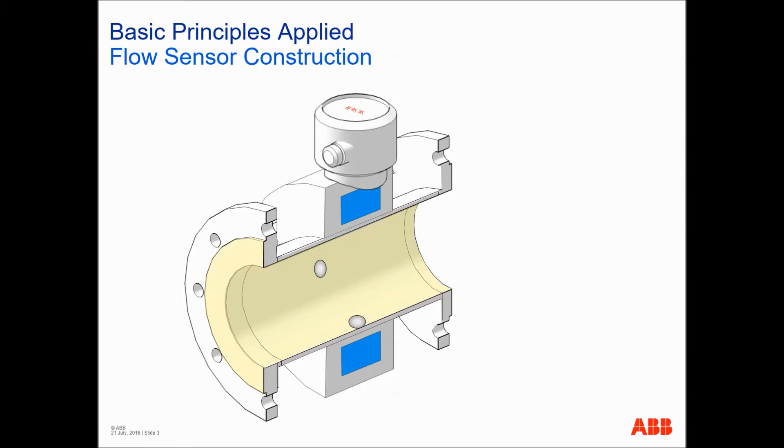Let's start this presentation by discussing the construction of flow sensors. The major components of a flow meter are the process connection, which is the flange, and it determines pretty much the pressure rating of the meter.

The outer flow tube is either welded onto the flanges or cast as an integral part. The sensor coil housing not only protects the sensor coils from the environment, but also the electrodes. The sensor head contains sensor electronics and user connections.

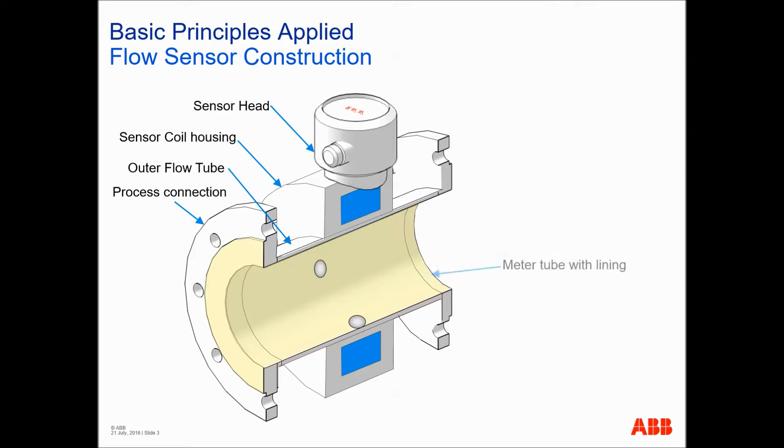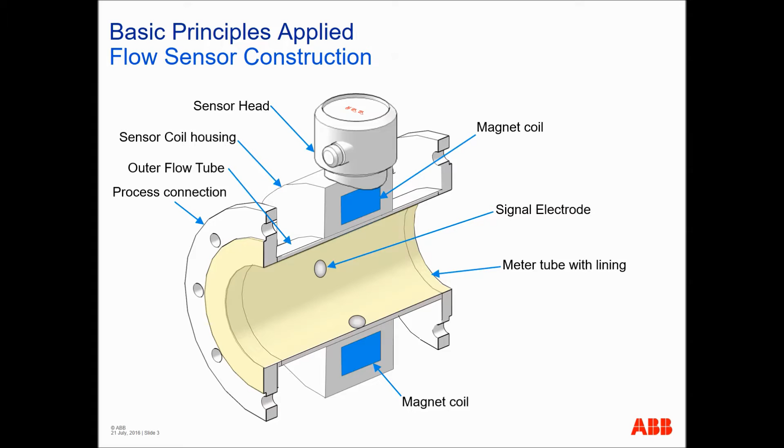The meter tube lining insulates the flow stream from the sensor body, the metal parts. The magnet coils, of course, set up the magnetic field. The signal sensing electrodes, there's two of them, one at the 3 and one at the 9 o'clock position. And some meters have a ground electrode.

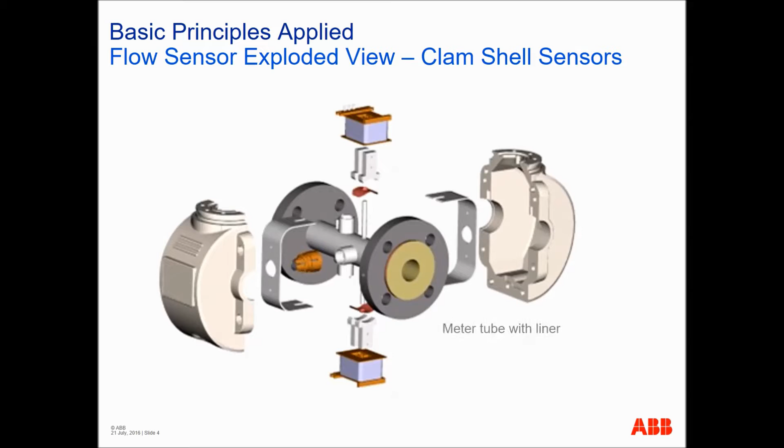Now let's take a look at a flow meter assembly and its components. We start off with a tube and a liner. The magnet coils are wound on precision spools. The mounting shoe and the guides position and hold the coils in place. And there's a signal electrode, which is usually built inside of a protective casing.

There's the ground electrode. It's basically just another electrode, but it's at the bottom of the meter at the 6 o'clock position. And then we have the magnetic circuit, which we'll discuss a little more in a minute in the upcoming slides.

And then the sensor housing. This is a clamshell design, which is bolted together and sealed so that water doesn't intrude into the internal parts.

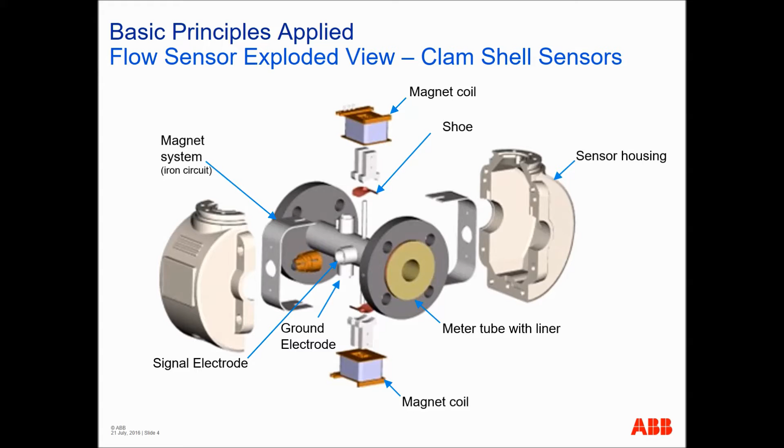Let's take a look at a flow tube, the basic components: the magnet coil, the spool, the stainless steel tube, the flow signal electrode, and the liner.

Without an iron circuit, if we were to excite the coils, it would set up an unevenly distributed magnetic field across the flow tube.

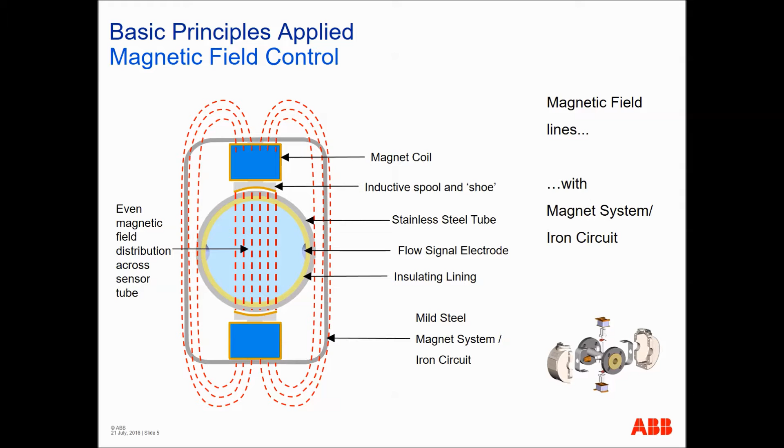If we were to add an iron circuit, mild steel, the magnetic force lines would be more evenly distributed across the flow tube, allowing for a much cleaner signal.

We have to remember that the calibration accuracy of an electromagnetic flow meter is dependent on the cross-sectional area of the flow tube, the column of water flowing through it, and the time it takes to go through that flow tube. If the pipe is not completely full, you inherently generate an error, and that error can be as much as 50% of the flow tube.

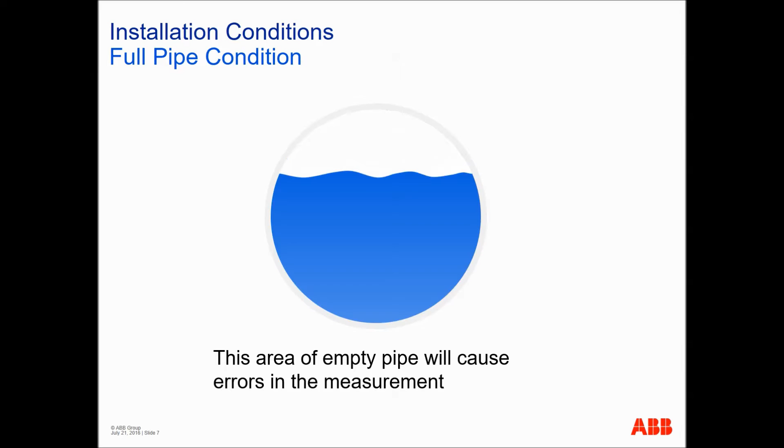If the electrodes are at the 3 and 9 o'clock position and they're covered by water while almost 50% of the pipe is empty, you would have a substantial error on the meter, and the meter would not know that it's not totally full.

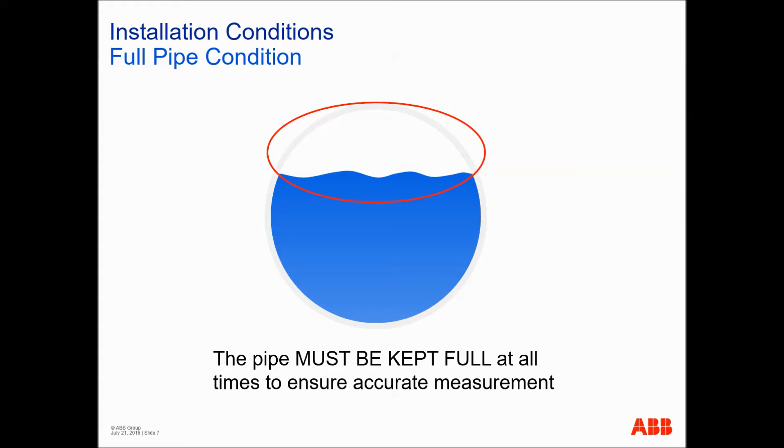This is where the installer, or not necessarily the installer, but the designer, has to ensure that the meter is installed such that it is constantly full and there is no possibility that you would have an air pocket trapped in the upper portion of the meter.

In this example, you can see that we recommend in a situation like this that the meter not be at the high point of flow, but rather that you could put it in the vertical position with upward flow.

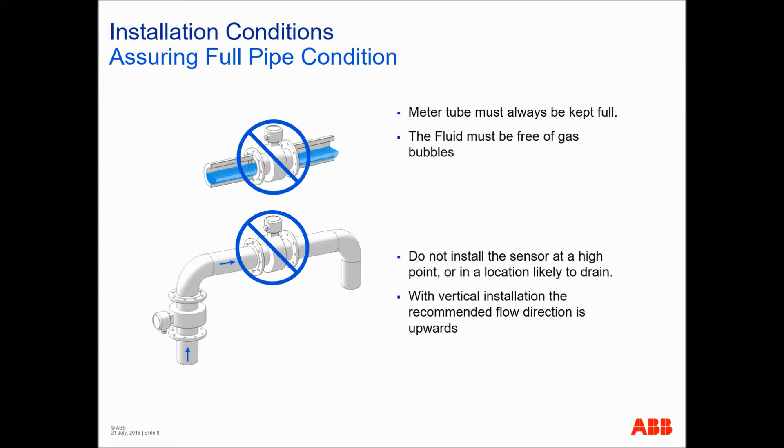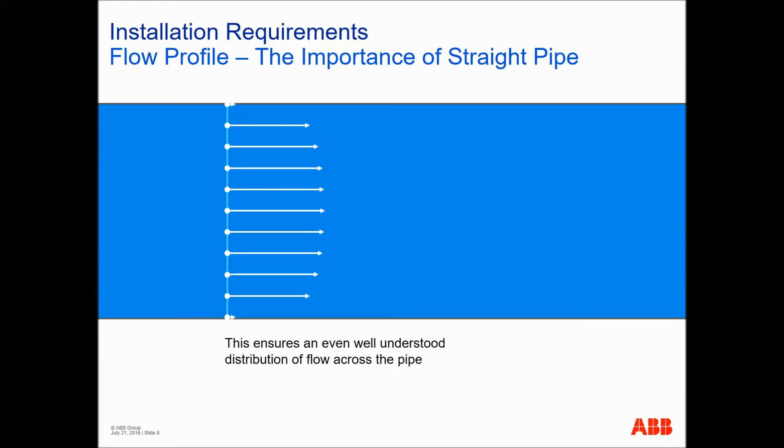We're always talking about the flow profile and turbulence. Mag meters for accuracy require a laminar flow profile, and that essentially is a profile where the maximum velocity is in the center of the pipe and it diminishes to zero as you get to the outside of the pipe.

We can take a look and see what happens to that laminar flow profile when you introduce a flow from an elbow or a T-section.

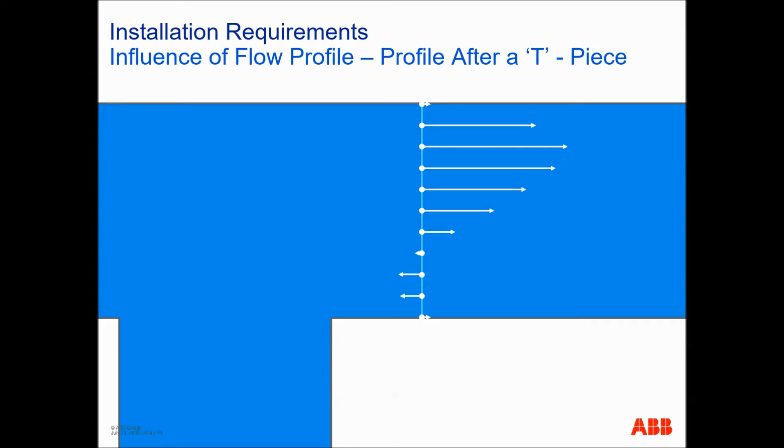If we take a standard flow profile and then introduce a flow from a T, you can see that as it rounds the corner, the velocity at the upper part of the pipe is going to be greater than the middle of the pipe. And in the lower portion of the pipe, you can actually see that the flow profile is reversing.

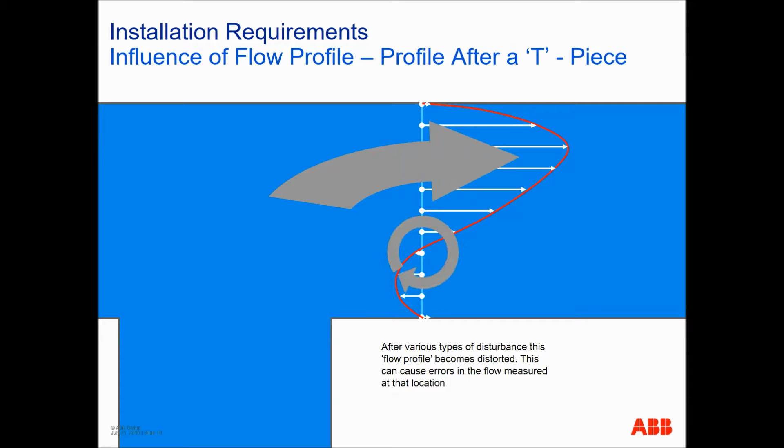This reversing actually causes a swirl in the meter. This is probably one of the biggest problems people have when they put a flow meter on an elbow in the wrong position without enough upstream diameter to dissipate that swirl.

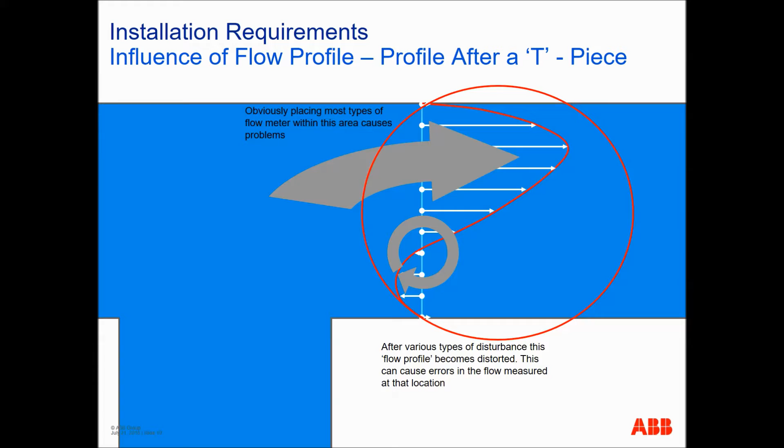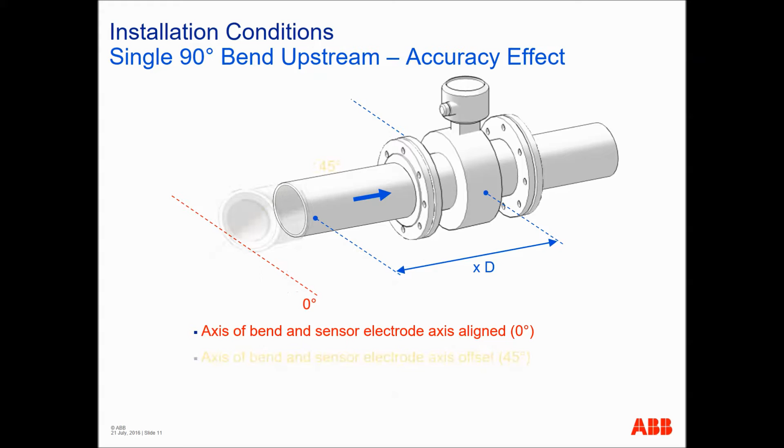Let's take a look at a couple of instances where we're going to put an elbow on the upstream side of the pipe at X diameters upstream. It's a 90-degree elbow, so let's start at the zero position. It could be either 0 or 180 out, coming the other way. Or you can put it in at 45 degrees or any angle in between. Or come in from the 90 degree, or flip it completely over and come up into the pipe.

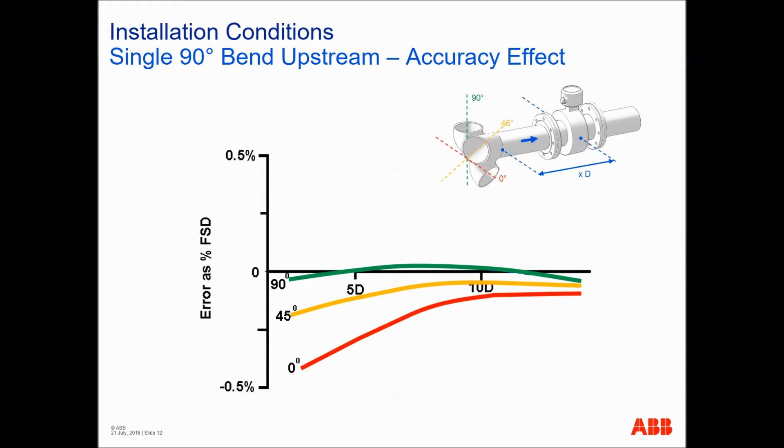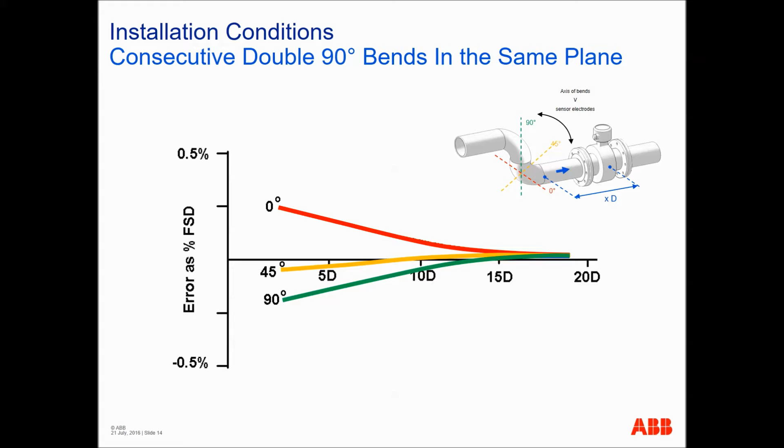It's predictable to a degree, but yet very unpredictable. And again, your best bet is to try and get as much upstream separation or straight run as possible.

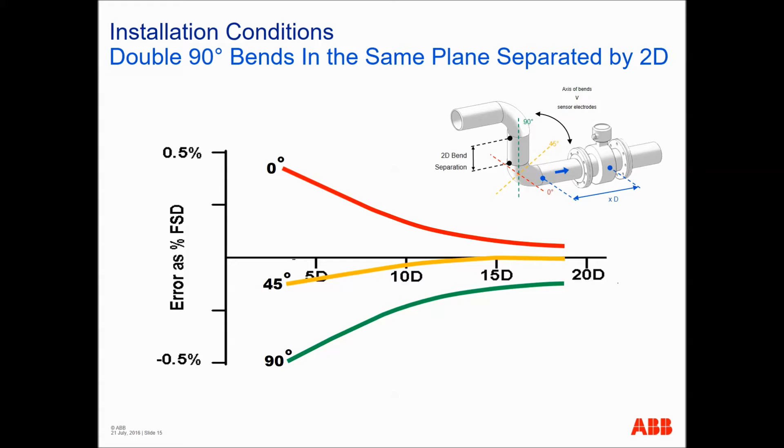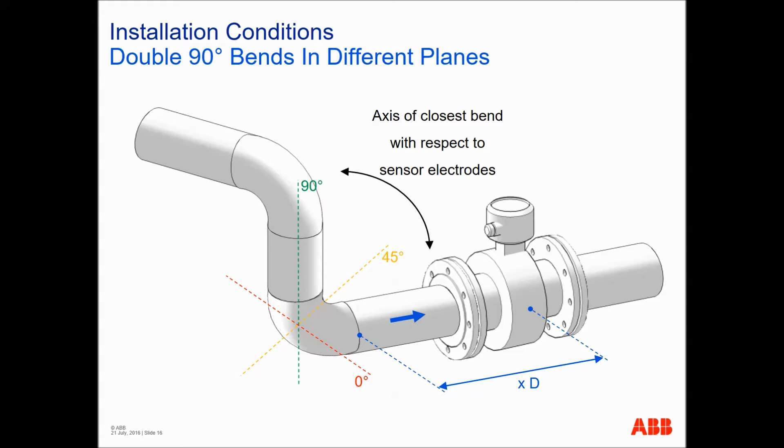Now this really starts to get crazy when you bring double 90 degrees in on different planes. And again, you're starting to mix 0 degrees, 45 degrees, 90 degrees. It literally wreaks havoc on the meter as far as turbulence going into the flow tube. And again, this is why we try and grab as much straight run as possible, to stabilize that flow before it gets into the meter and across the electrodes.

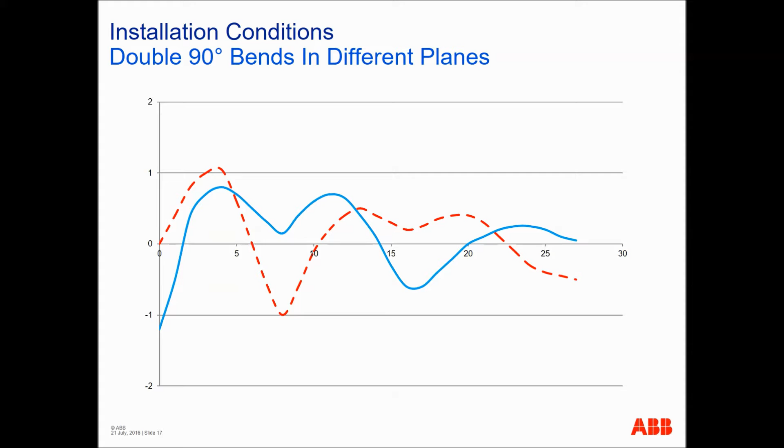By the way, we want to emphasize the flow arrow here. If you have bidirectional flow, all bets are off on this one.

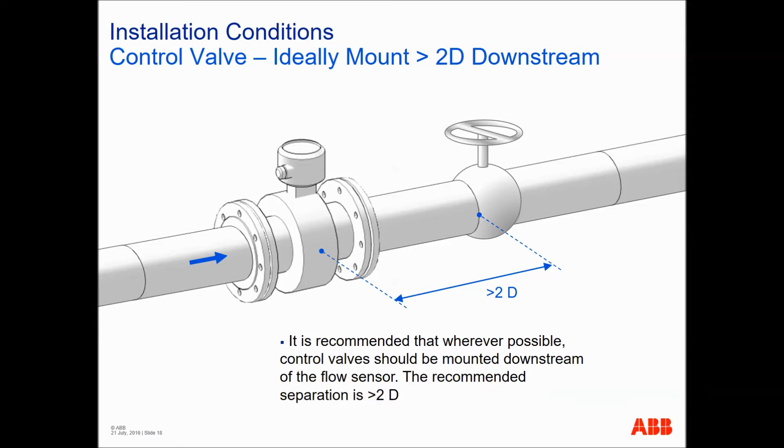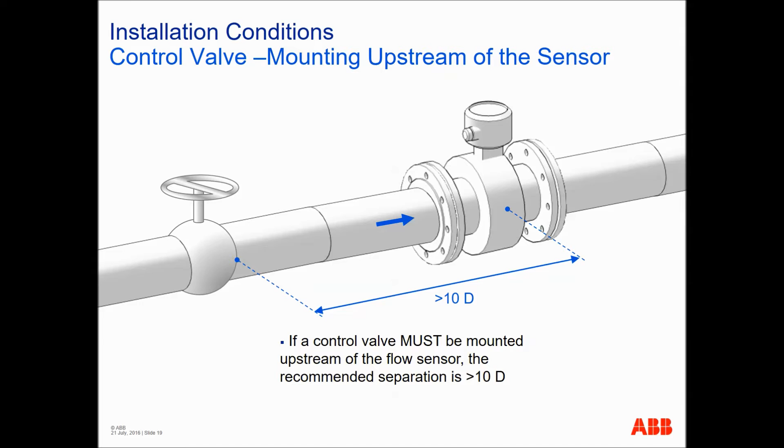The only thing you got to do here, we'll talk about bonding, is bonding would be very critical in a situation like this. And when we say bonding, we're talking electrical bonding.

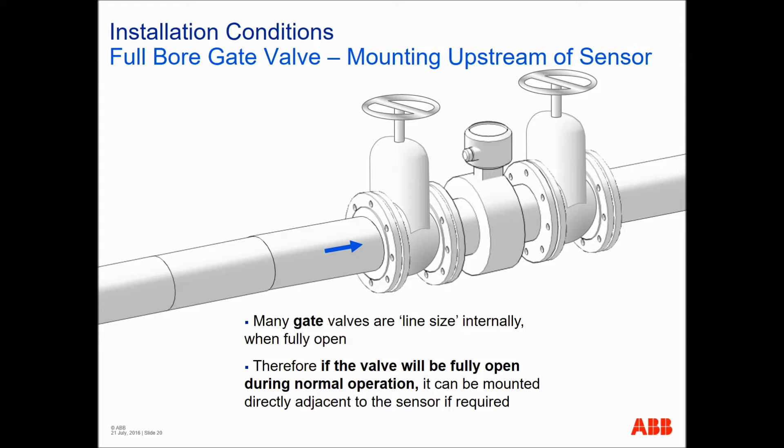As a rule of thumb, putting reducers at the inlet and outlet of a mag meter really doesn't affect it, as long as they are concentric tapers and not eccentric tapers. If you have an eccentric taper, you're automatically going to change the velocity on one side as opposed to the other, and that will cause turbulence and inaccuracy in your readings.

Some of our data sheets and tech bulletins contain this table, showing the relative type of sensor and inlet/outlet upstream pipe diameters. You'll see the AquaMaster is 0 pipe diameters, both upstream and downstream. Notice that the elbows come in from above or below, so that it does not generate swirl turbulence from coming in from the side.

AquaProbe is a whole new animal. It's an insertion type meter, and they are very sensitive to turbulence and disturbed flow. So the general consensus is, on the inlet side, flow going from inlet to outlet, you're going to want 25 pipe diameters upstream and 5 pipe diameters downstream.

And they don't play nice. ProcessMaster, you can pretty much get away with 3 pipe diameters upstream and 2 downstream. The FSM 4000 again follows that same principle, 3 up, 2 down. And WaterMaster, you can have 3 pipe diameters upstream, and you'll see we have the hexagonal or reduced bore, and 0 downstream has a tendency to smooth the flow out and prevent turbulence.

And if you want higher accuracy, you've got to have that 5 pipe diameters upstream. As a parting note, it just makes common sense that the more upstream straight run you have, the smoother and more laminar your flow profile will be.

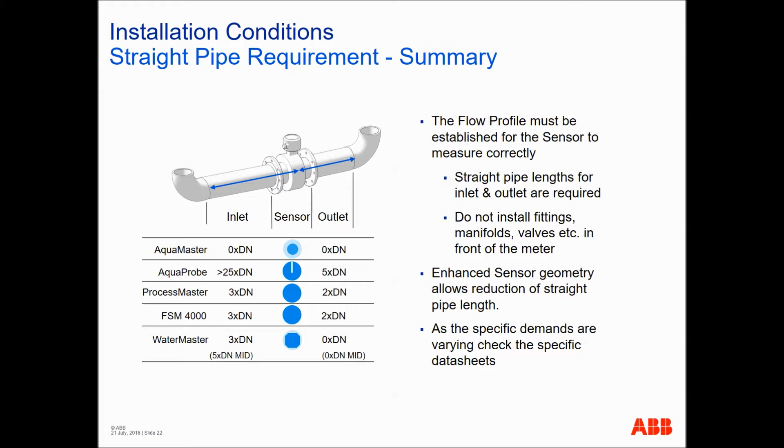Now we're going to start into the part of installing a flow meter that is the great mystery, and that is the fluid contact rings and grounding plates, and this will segue into bonding of the meter. The function of a ground ring or fluid contact ring is to complete the measuring circuit through the flow meter, from the electrode through the flow stream to the meter body. That's its function. That's its only function.

If you put them in there and use them as a metal gasket and don't hook them up, and you call us up and say my meter is reading all over the place, the first thing we're going to tell you to do is connect your ground ring to your meter body. Step 1.

Now, ground rings come in a variety of types. You'll see that we have a ground protection plate. That's a protection plate that serves two purposes: one, it is a ground or fluid contact ring, but it also protects the liner, and it's mounted on the meter, so you don't have to take the screws out or remove it. Gasketing is metal to metal. Whenever you have a metal to metal contact, you have to gasket to seal it. Metal to metal does not seal well.

Or you have your insertion ground rings. You also have your PTFE for the chemical industry. That's a conductive PTFE, and they're used... I mean, they're expensive, obviously, but they're kind of a specialty item for processes where you can't use metals like Hastelloy C or stainless steel.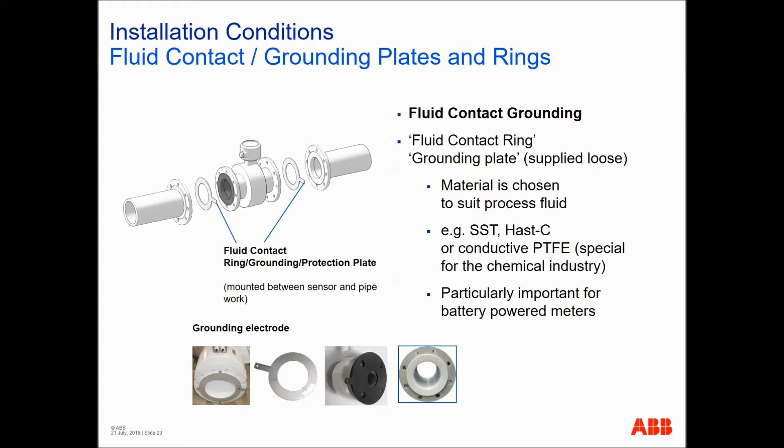But before we move into bonding, we're going to talk about something that's starting to pop up a lot in the water industry, and that is impressed cathodic protection. It's an even bigger mystery than ground rings. Impressed cathodic protection imposes a current or a potential on the metal pipe to reverse or nullify the galvanic corrosion effects. Whenever you put a metal pipe in the presence of a conductive fluid in the earth, which has minerals in it, the pipes corrode.

They coat the pipes with petroleum-based products, and now we're starting to see these impressed systems where they have big electric generators. The pipes are electrically connected to each other, and they run a 50-volt signal, as much as 50 amperes, through it. The idea is it's just like a battery. If you reverse the polarity of a battery, you're not going to kill the battery and diminish the metal product in it to generate the voltage, but instead you're going to prevent that electrolytic action from happening.

This represents a problem to mag meters because mag meters sense voltage. Here we can see we're putting voltage into the pipe, which is in the conductive flow stream, which comes through the meter and swamps the meter out, and in our meters it'll shut it down.

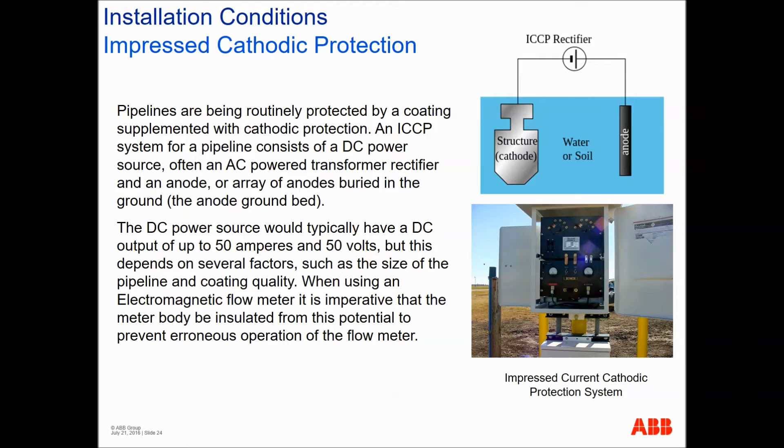When you install a meter for cathodic protection, you have to completely insulate the meter body from the pipes that it connects to. This requires insulating washers, or gaskets, on both sides of the fluid contact ring. The bolts have to be put through insulating sleeves through the flanges. The heads of the bolts have to be insulated by insulating washers, and the nuts have to be insulated using insulated washers. You don't connect the meter or the meter body to the connecting pipes.

It's a tricky thing that has to be done, and we've had several cases where people have run into problems because they don't quite understand how all this goes together. It is an expensive prospect just to put the meter in. It's not your basic nuts and bolts kit. You basically got to go out of your way to make sure that this thing is electrically insulated from the pipes on both sides.

Another addition to this, not in this presentation, but in battery-powered meters such as the Aquamaster, the sensitivity of the meter and the low voltage capabilities of the electrode recommend 50 pipe diameters upstream of insulation. In other words, what you connect to the meter, you should have 50 pipe diameters of insulation.

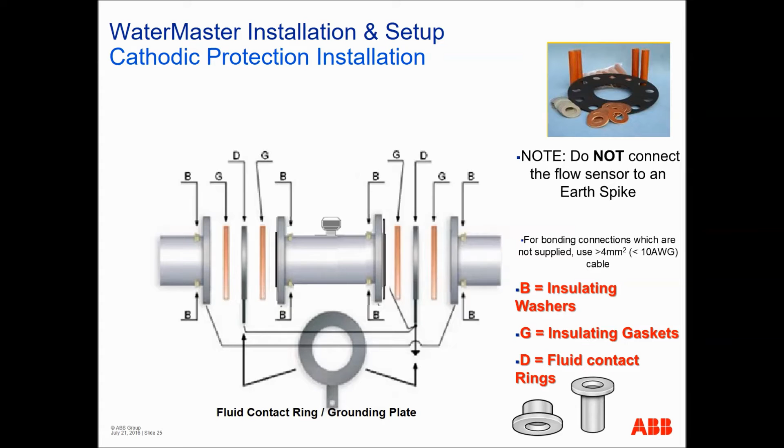Well, here's another mystery of installation, and that's the torque value. People call us up and they say, I got this mag meter, what do I torque it to? In the old days, yeah, we did supply torque, but we also supplied the bolts, the nuts, the lubricant, and the gasket. Nowadays, we just simply sell a meter because, of course, for price reduction, they eliminate all that. People want to supply it themselves.

In order to know how much torque to put on a system, you have to know, one, the process pressure. You got to know how much pressure is going to run through it. If you don't torque it enough, you'll blow the gasket out. You also have to know the gasket specifications. You have to compress a gasket so much for the operating pressure you're going to operate at, and that's given to you by the manufacturer who made the gasket.

The number of bolts in a flange, well, yeah, we can count those. The flange rating will give you the maximum torque you can put on the unit. If you exceed the maximum torque that the flange is rated for, which you can find out in the ASME specifications, you'll warp the flange. Yeah, you can warp that flange.

And the bolt specifications, you have to take that into consideration too, because you can actually put so much torque on a bolt, you can snap it or stretch it, just like a rubber band.

Now, it's not all that difficult. You can go through tons of calculations and just make yourself crazy. There are plenty of sites online where you can throw all your parameters into and they'll calculate the torque for you. But there's always been this cute little formula that's been hanging around for years, straight out of mechanical engineering manuals, something I learned at Drexel. You can estimate torque, and it's very accurate for the most part.

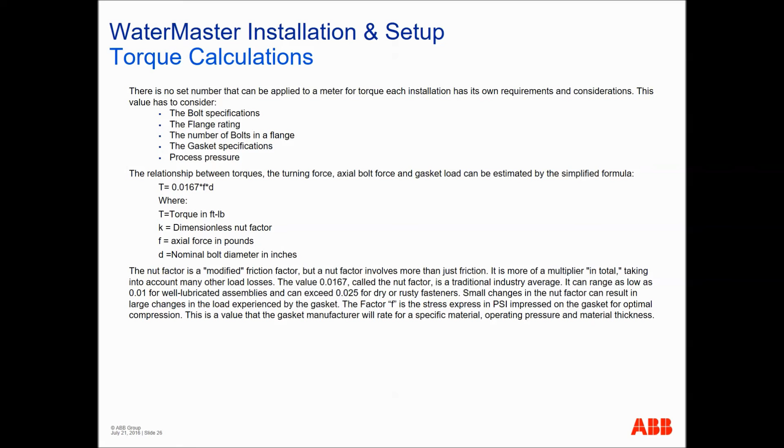Let's take a look at an example of how we used to do it back in the old days when we actually printed this data in the manuals. This is an example I put together for an 8-inch meter that made the torque estimates.

All the bolts are new, and the material selection is in accordance with EN 1515-1 Table 2, which is a spec for galvanized bolts. The gasket is a homogeneous rubber with a Shore durometer A, not to exceed 75. That's a typical rubber gasket.

All the bolts are galvanized and adequately lubricated. It means you pretty much slap the grease on there when you're tightening this thing up—all the threads, not some of the threads. The values are calculated using carbon steel flanges. That's straight out of B16.5.

The flow meter and mating flanges have to be correctly aligned. You can't have things hanging out in midair with some stuff doing the cantilever thing. Now you're given the operating pressure of the system you're working on, and I chose 300, 600, and 2,000 pounds, and 3 gasket widths: a 1/32, a 1/16, and a 1/8 gasket.

Now you have to put 2,500 psi, 3,600 psi, and 4,800 psi on these gaskets in order to seal up to 300 pounds and so forth. Using that formula on the previous page, what you come up with for a 32nd inch gasket is 31 foot-pounds. For a 16th inch, 45 foot-pounds. For an 1/8 inch, 60 foot-pounds. You can see it just goes up as you get thicker, and as the pressure increases, they increase as well. Pretty much straightforward stuff.

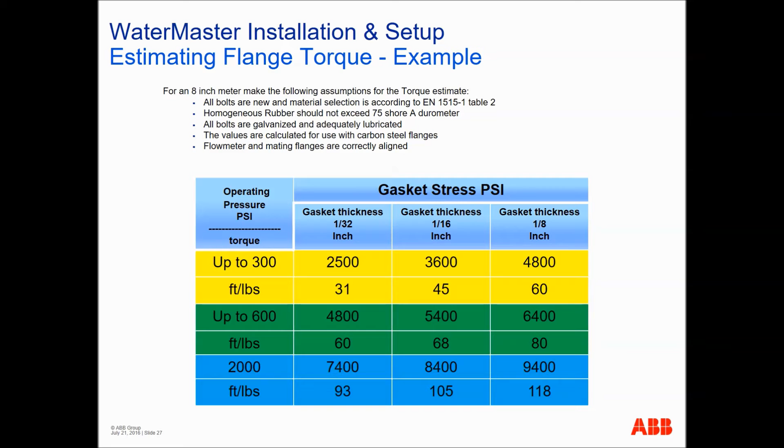When I was installing meters or supervising the installation of meters, I can't tell you how many times we had to start all over again, because it just seems that people didn't get it, that the torquing sequence has to be done a certain way.

Also you do have to lubricate all the threads. That's important, because you can bind up a thread if the nut and the bolt just get onto a metal-on-metal surface, and then your torque calculation is out the window. So I'd always have to be particularly cognizant during that portion when they're getting the meter lined up, getting the bolts in, getting the screws on, and snugging them up.

Now, snugging them up, you can snug them up by hand. It takes a little bit of work, I admit, but you can snug it up by hand. Then you start to do the rounds.

Round 1 of torquing is done at 25% of the final torque value, and you do the alternating torque: 1 to 2, 3 to 4, 5 to 6. But you do 1 to 2 on the upstream flange, then 1 to 2 on the downstream flange. Then you go to 3 to 4 upstream and 3 to 4 downstream. That's the part that a lot of people miss.

You torque up one side of the meter, and then you torque the other side—you're loosening or stretching the other side. Torquing has to be a sequential and equal process, trying to keep it as equal as possible in order to get it right.

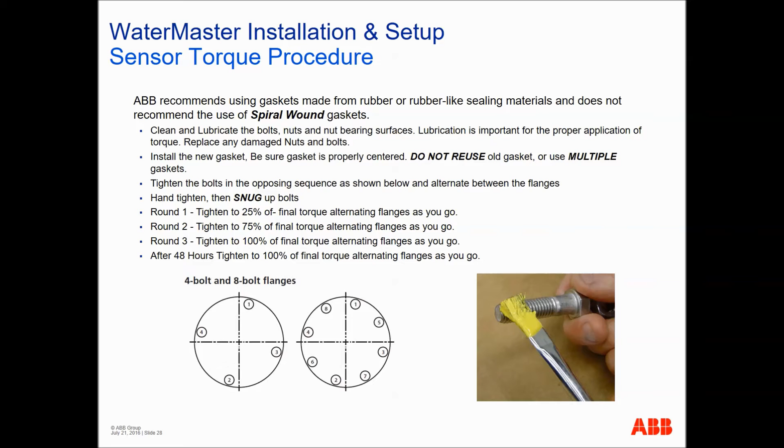Well, I've said enough about torquing, so now let's move on to bonding. As we said before, the fluid contact rings serve really one purpose, and that is to complete the measuring circuit from the electrode through the flow stream to the meter body.

Now, when you're using plastic pipes, and I don't care what meter you're using, you have to have 2 fluid contact rings on both ends of the pipe, and they have to be bonded to the meter body.

And I'm going to say this because it's going to be repeated over and over again: never, never, ever spike the meter body. What that means is never take one of these wires, or any wire, from the meter body at any point, drive a rod into Mother Earth, and then connect it to ground. Real simple explanation, and in later seminars we're going to cover that in troubleshooting—what did I do wrong to make my meter all black on the inside.

If you take a lightning strike somewhere and it can't find Earth anywhere else, it surely will find Earth through your meter and every piece of electronics along the way.

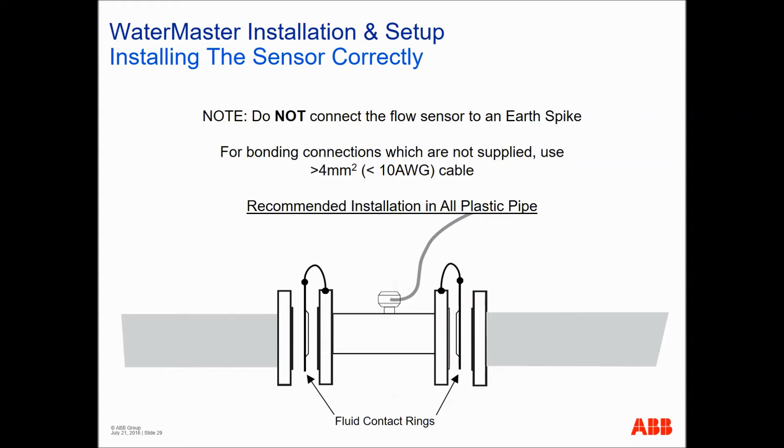When you're bonding metal pipes, it's kind of hard for people to understand that you have to bond all the metal parts to the meter body. The fluid contact ring has to be electrically bonded to the meter body, and the connecting pipes have to be bonded to the meter body, so that all the metal components that would come into contact with the meter and the fluid stream are at the same potential. It's kind of a simple concept.

Now, I'm showing a cute diagram here where we have a flange from a pipe and a flange from a pipe and a meter with a fluid contact ring. If you have multiple flanges, say through a valve, you have to bond them too, because if you go 6 inches upstream and then you have some rubber gaskets and a valve and rubber gaskets, you're going to have the same situation. It will get down through that flow stream and it will offset your electrode signal. And the meter is too dumb to realize that it's an offset induced by some potential on the pipe or some stray voltage in the flow stream. The meter doesn't know the difference, and it will register it as flow.

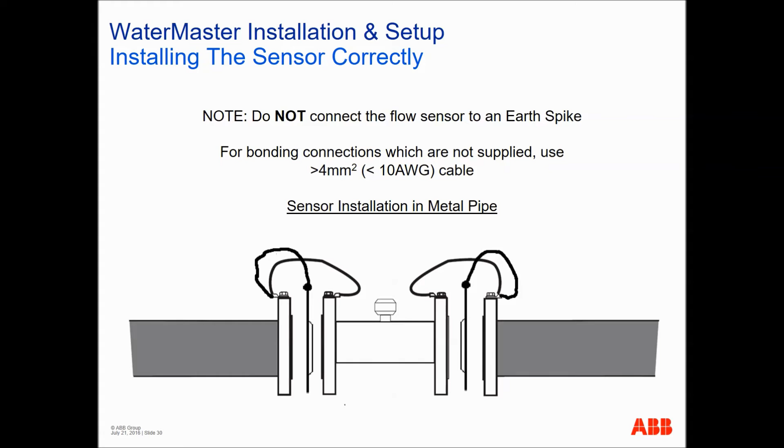This is one of my favorite scenarios, where you have flange adapters. Flange adapters are bolted on, and there's a coating on the pipe, and there's rubber gaskets on it, and when I was installing, I've never seen a flange adapter that was an integral electrical part of the pipe itself. It's not meant to be. It's meant to adapt the pipe to another flange.

What you're seeing here is a recommendation that you weld studs on. And somebody says, what? Weld studs on? It's an electromagnetic flow meter. We need positive electrical contact. Grinding down the surface and holding it on with a clamp is not going to work. It will work for a couple of months, and then you're going to be down in that mud hole cleaning it up, using goo on there to keep it clean. That doesn't work. 40 years in the business, I've seen a lot of people try a lot of things.

There's only one tried and true way. You weld a stud onto the pipe and you screw or thread that stud, and you screw your connector onto it and bond the pipe to the meter flange, the fluid contact ring to the meter flange. All the metal parts are at the same potential. And the flange adapter, we really don't care, because it's going to be in contact with nothing for all intents and purposes. Now, once again, I'm going to stress, do not spike the meter to Mother Earth.

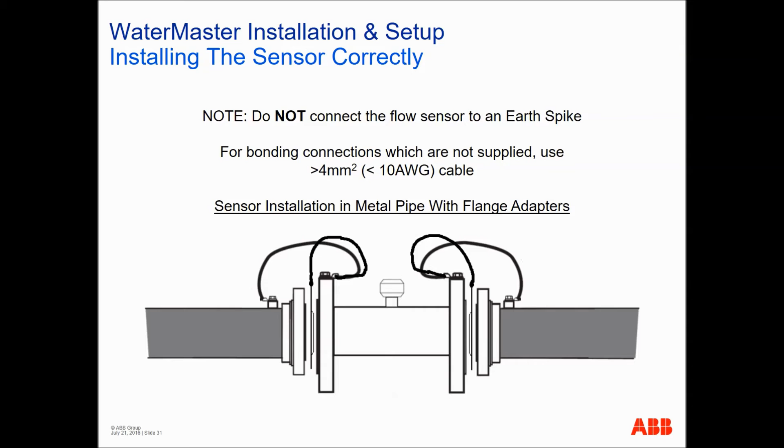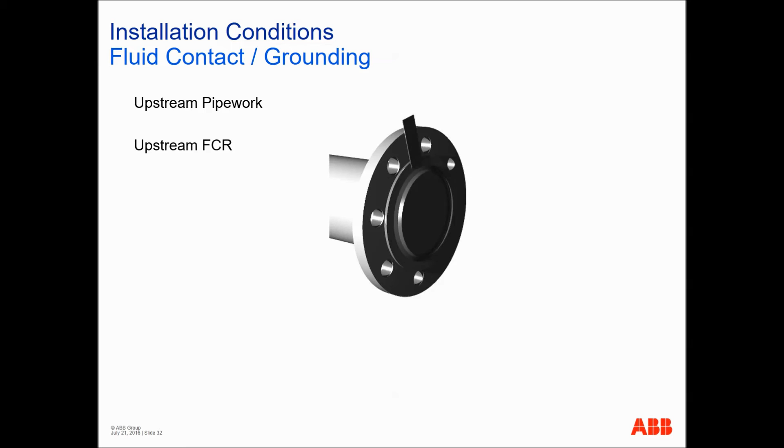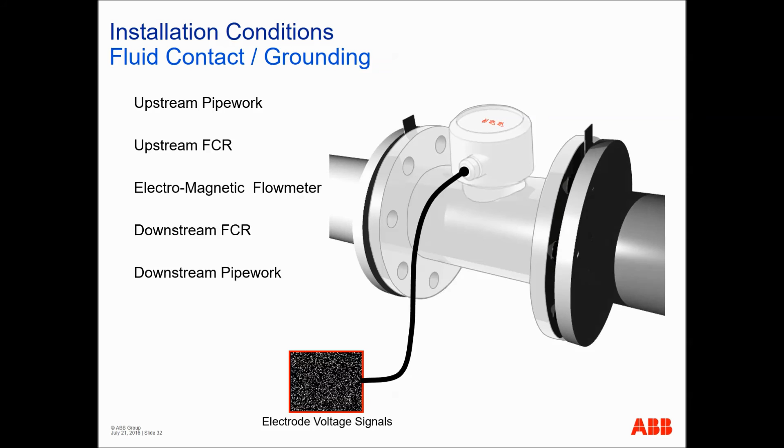That is a lightning strike dissipation waiting to happen. Okay, this is one of my favorite slides where we reinforce how to assemble any meter. First, you got your upstream pipe work. Then you want your fluid contact ring in there. Then you put your electromagnetic flow meter in there. Notice the little noisy signal there. Then we put the downstream fluid contact ring in. Then we put the downstream pipe work in. Okay, so now we got it. By the way, what's missing here are the gaskets. I left them out. It's just too much work.

Now we want to equalize the potential. So we're going to take the fluid contact rings, and we're going to put them in contact with the meter body. Electrode signals are okay, but we're going to cross bond too. Why are we going to do that? It's belt and suspenders, just to make sure. That's a nice slide.

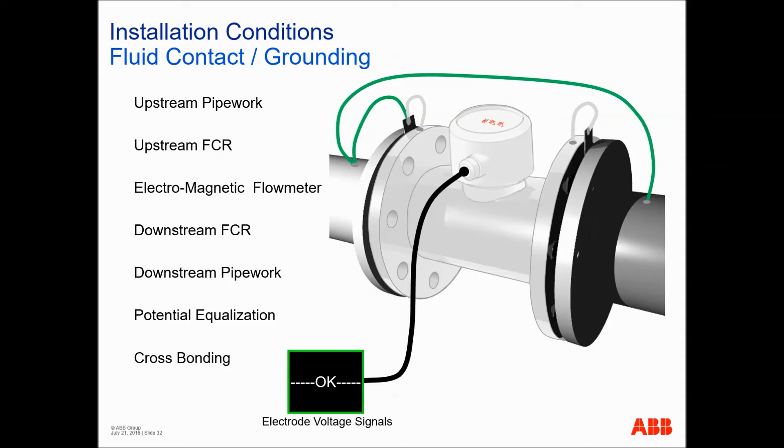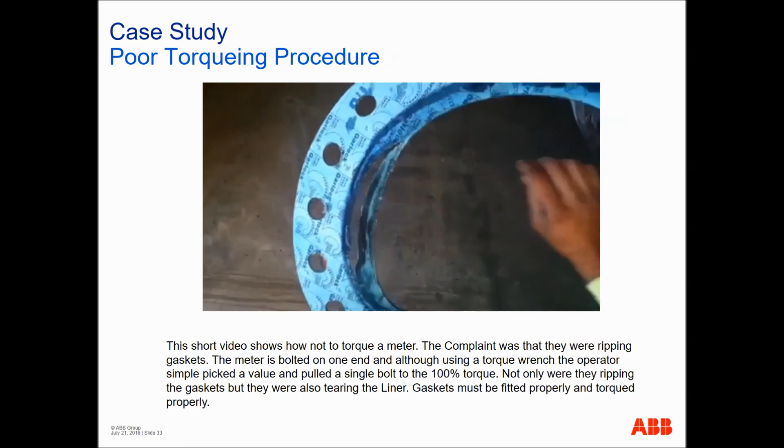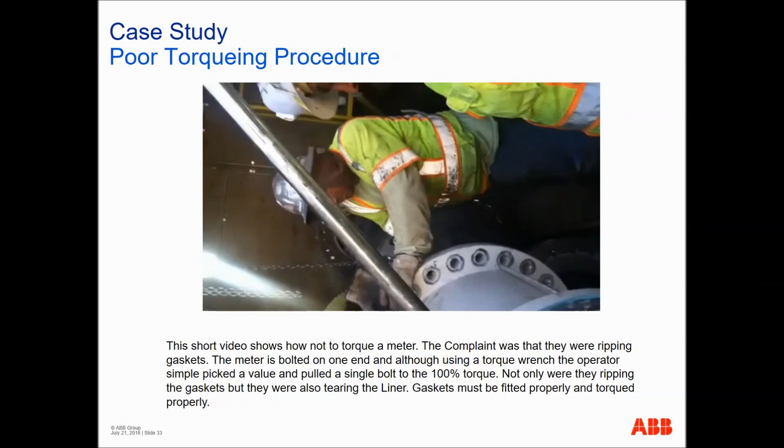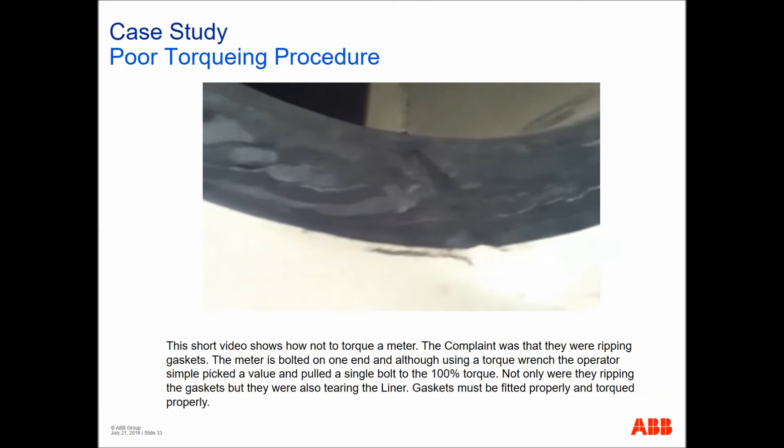We're going to look at some case studies here, and this is the first one, and the complaint here was that they were ripping gaskets and tearing the liner. This was a relatively large meter, and as you can see there, they are in fact tearing the gaskets, and you'll see in a minute that they were ripping the liner. Pretty sure the gasket wasn't properly fitted, but that's secondary to the fact that the meter is hanging on one end in midair when he's torquing, and he's putting an incredible amount of torque on there. I think we estimated that they were putting about 400 foot-pounds of torque on there. I don't know what the breakaway setting was on there, but the maximum recommended torque for that particular meter with that particular flange, the maximum would be 170 foot-pounds.

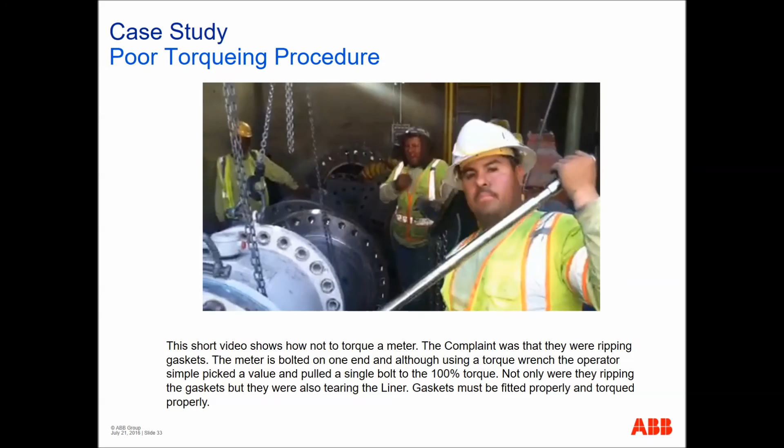They did, in fact, kind of destroy the liner on this meter, but this is not a proper method for torquing.

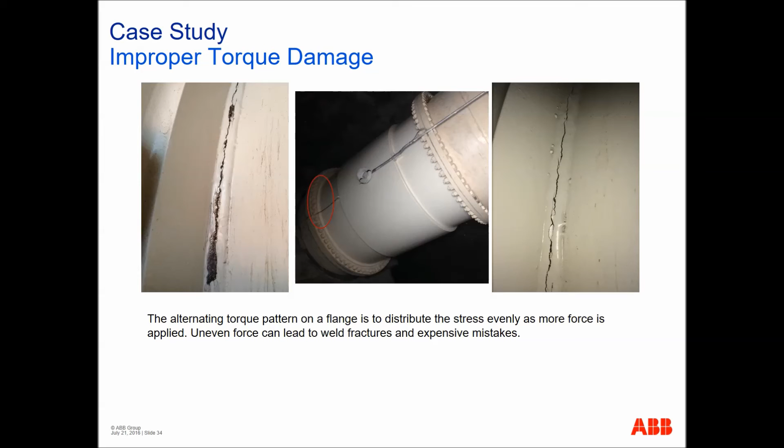There's a case of improper installation for a slurry. When we first took this case, there was a problem: it was getting erratic readings and a lot of noise errors. The original explanation was that it was a slurry, the flow was upward, and everything was tight and dandy.

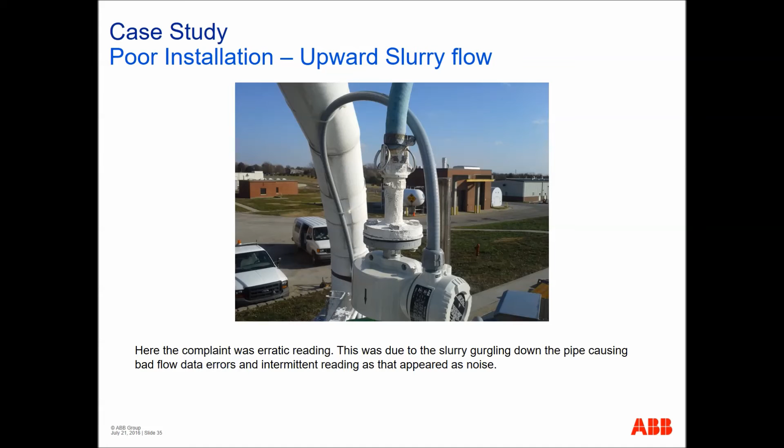There's a specification in the manual - these are water masters - that they had to be a minimum of 2.7 feet apart. You have to remember that the coils are powered depending on what's going through them. The power goes up and down, it's not a fixed voltage - there's an automatic gain control in there. So we say 2.7 feet minimum, and I always say get them as far away from each other as possible, just so they don't talk to each other.

The resolution here was he had to move one of the meters.

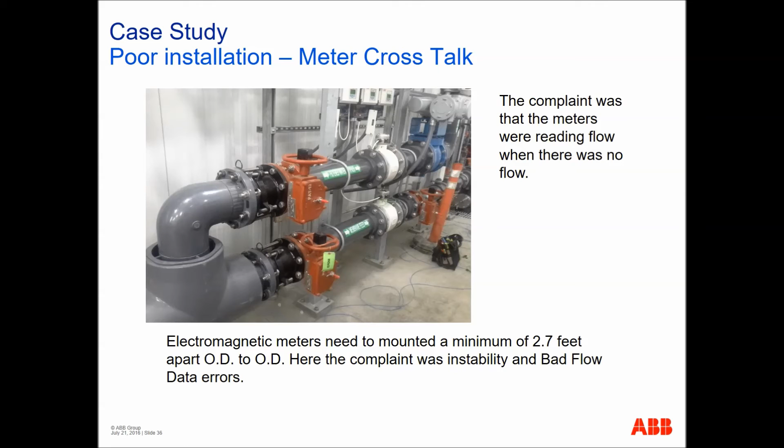If you worry about the flow arrow on a meter, all of our meters, and every meter on the market, is bidirectional. You can go into the software and change the way it reads, plus or minus, left or right. Doesn't matter, just put it in so it fits. You can wire it, you can read it, and then we'll work it out in software. In later seminars, we'll get into the commissioning and programming of meters and show you how that's done - it's like 5 or 6 button pushes.

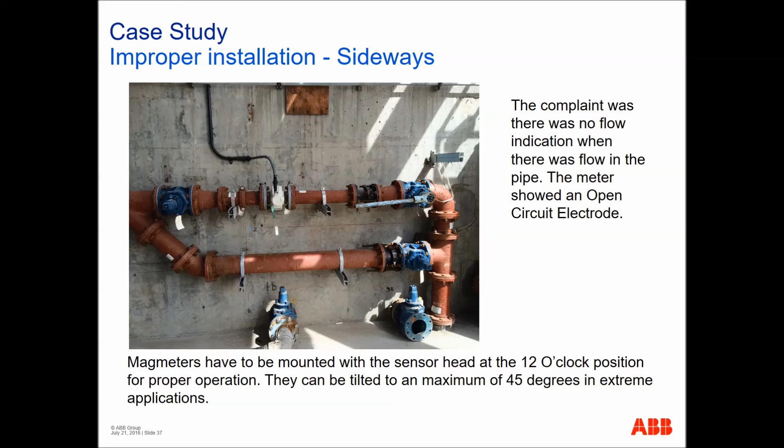You also have an access port, an injection port, and a pressure port. This poor operator just had bad flow data at the wazoo, and there really wasn't a whole lot we could do, and not a whole lot he could do, because you just don't get in there and take a welding torch and start cutting pipe. This should have been caught at the engineering stage, and somebody should have thought this one over more carefully. The best we could do for this operation was increase his dampening to 60 seconds - 5 times 60 is 300 seconds before you get a stable reading out of it, and that's the best we could do. Noise filtering, of course, really isn't going to help, because this is a pure turbulence problem.

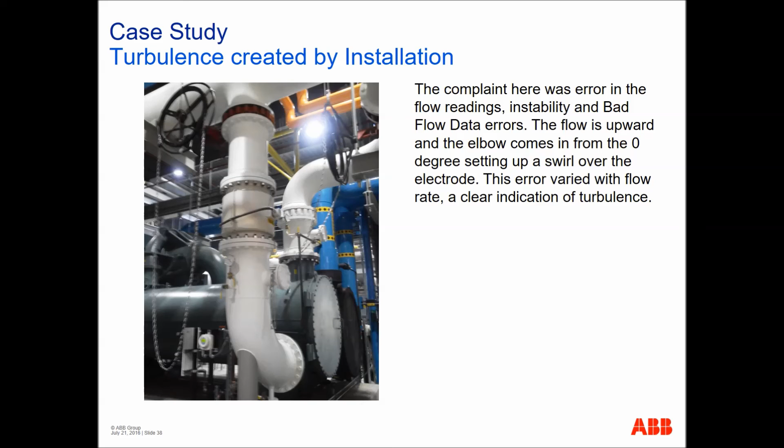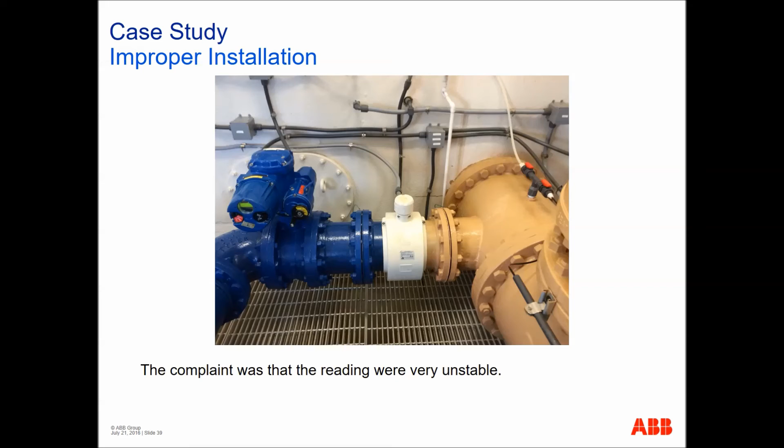I'm not sure if this one even got off the ground. This is a process master, I believe a water master, could be a process master in the H1 enclosure. Nonetheless, it's a mag meter, and you'll see on the inlet a big motorized valve. Yikes. Then there's a manual valve in front of that, and then it goes right into an elbow, which is connected to a T, which comes from another meter doing the same thing. I honestly don't know how they thought this was going to work, but as you can see, it did work because they didn't even wire it up. This was a picture, there were multiple sites like this. I think, and this is only me thinking, the recommendation is to move that meter on the other side of all that valving and stuff and see if you can get straight run coming into the meter, as opposed to leaving it in its current position. And I think that's the way we ultimately got this thing to work.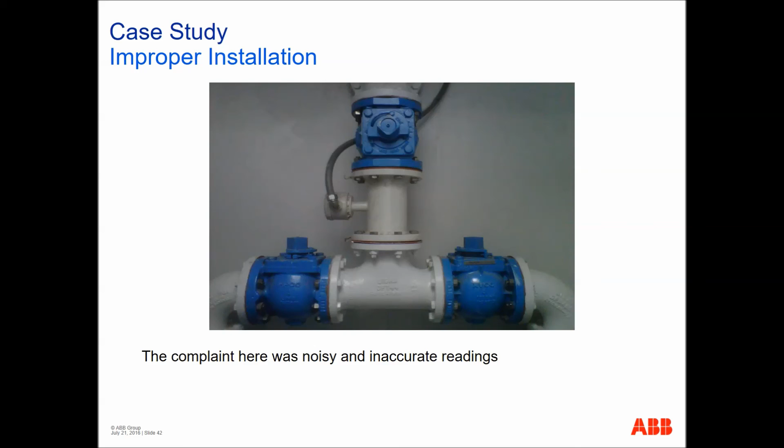So we've come to the end of all the case studies, and now we're at the part that's near and dear to my heart. In every case that I take, I usually end up asking the question, do you have documentation? A lot of people say, well, I've got this 5x7 thing with 40 pages in it, and that's if you do get that and nobody throws it away with the box. That's kind of a startup manual, which isn't really a startup manual. Companies don't print a lot of documentation these days. Why? Because it costs money and people throw it away. And anything that costs is going to be rolled into the price of the meter, so to reduce costs, they reduce things that people are just going to throw away anyway.

Along comes the internet, and everything that we know and have available about this meter is on the internet. It's very simple to find, and a lot of people say, I've looked for hours online, couldn't find it. It's simple. You type ABB.com and you select the new ABB. Always select the new. Why not get new?

Everything is downloadable in PDF, and you have software that is free and available on these websites. A lot of times people want us to email manuals. A lot of times I spent emailing manuals only to have them rejected by your servers, because a lot of servers won't take the load. Manuals sometimes can be as much as 12 megabytes each. So it's better, this is a kind of an FTP transfer, it's better that you go up, find your manual,